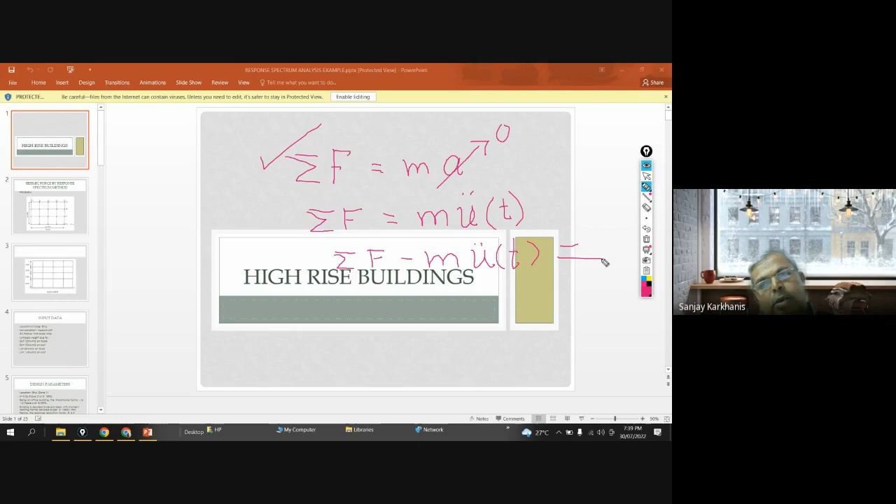Okay, D'Alembert's principle. If you go back to structural dynamics, or simply dynamics, you will see that D'Alembert found this equation, that similar to static equilibrium, this is dynamic equilibrium, and this m into acceleration is called inertia.

So this is why we are interested in finding out mass of the structure, because finally you have to solve this equation, and now this equation is not a simple equation. It is a dynamic equation which is varying at every time. So at t equal to 1, it will have some different equation, t equal to 2, it will have a different one.

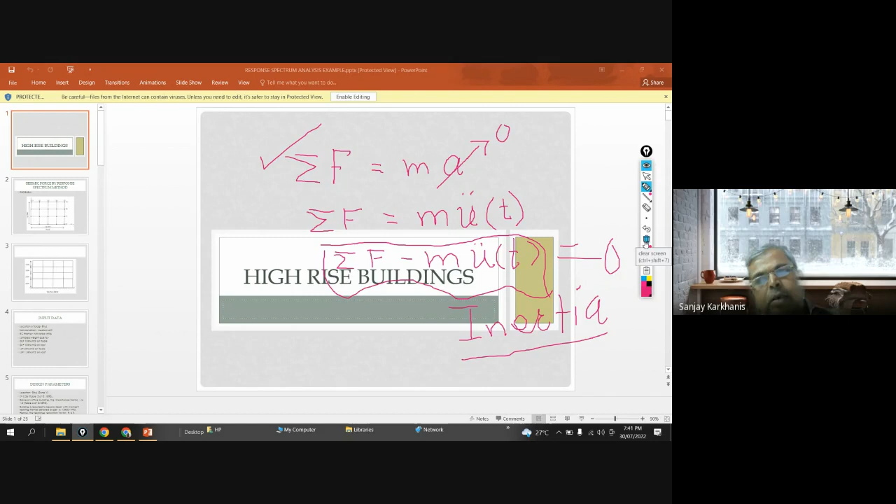And that's why this dynamics becomes a little bit complicated. The only thing is that if you can find out the inertia and include the inertia effect, then finally you will see that F minus m u double dot t will be equal to 0. So this is why we are finding out inertia effect, and we are relating any dynamic force with that. Now we are going to use that, so we'll find out the way how to do it. Let us go and see.

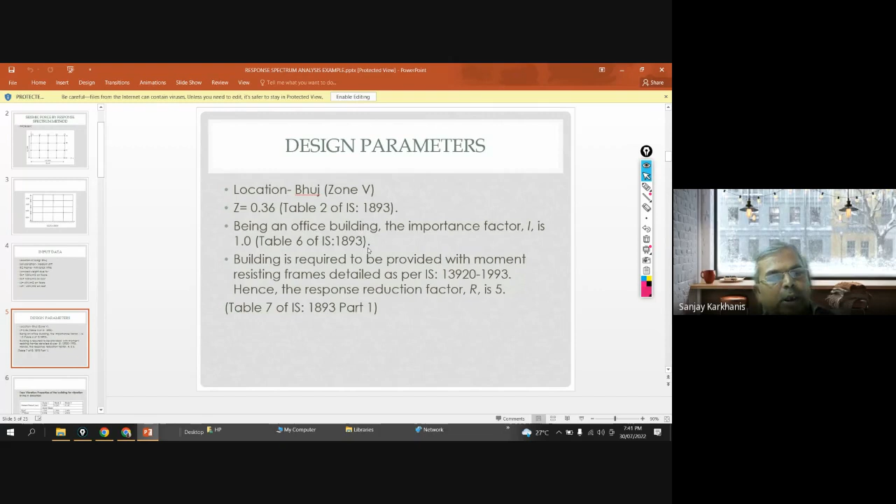Now this is the only thing that you should understand. We are finding out dynamic characters, and as previously I discussed, every building has its own dynamic properties. In equivalent static method, we considered only this much mode, this first mode. So we said that the building will vibrate something like this, and finally we calculated VB, and this VB was distributed at every floor. We said the deformation is this, meaning only this shape, first mode. But actually, this is possible only for degree of freedom equal to 1, right?

But if you see any building or structure, the mass is not concentrated at any one point. So it is distributed all over the floor, and all over the height. That's why we are distributing, or assuming the mass distribution at floor. Let's say if you are having 3 floors, every mass has a degree of freedom in one direction as 1. So there are 3 masses, so degree of freedom will be 3.

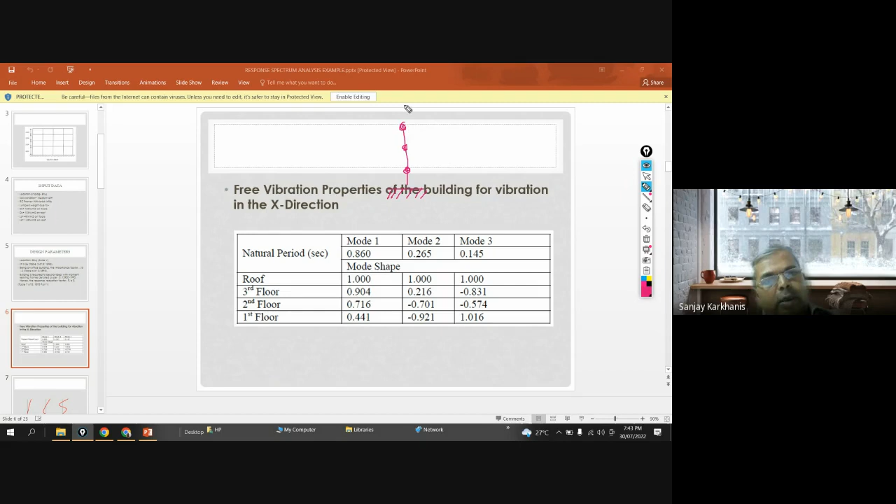And with respect to that, if you go for dynamic analysis, you will find this as mode shape 1, then this will be some mode shape 2, and this will be some mode shape 3. I'm just saying pictorially, but this mode, it is a property of a structure, and it is found out with the help of free vibration analysis. How that free vibration analysis is carried out is a topic of structural dynamics. Let us say we have one instrument which will give you the dynamic properties. So these are the dynamic properties.

So we have carried out the analysis for the above said building in our example, and we are considering this as input for us, which is actually output of free vibration properties of the building for vibration in the x direction.

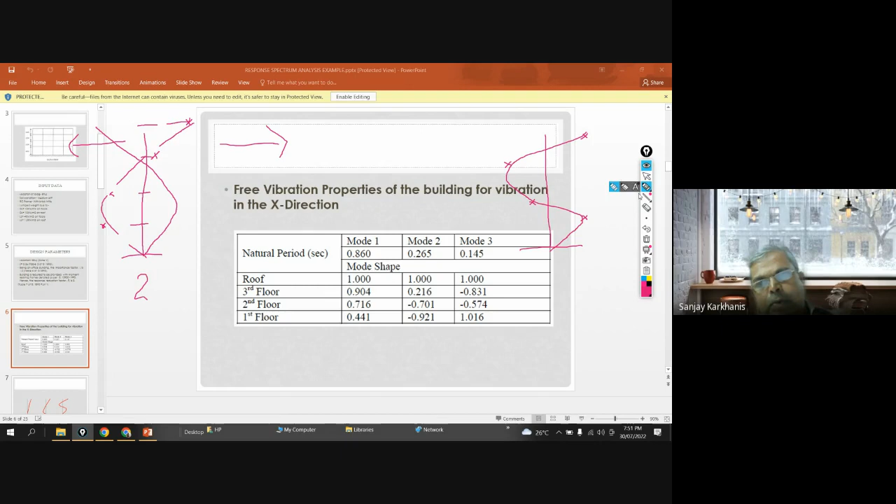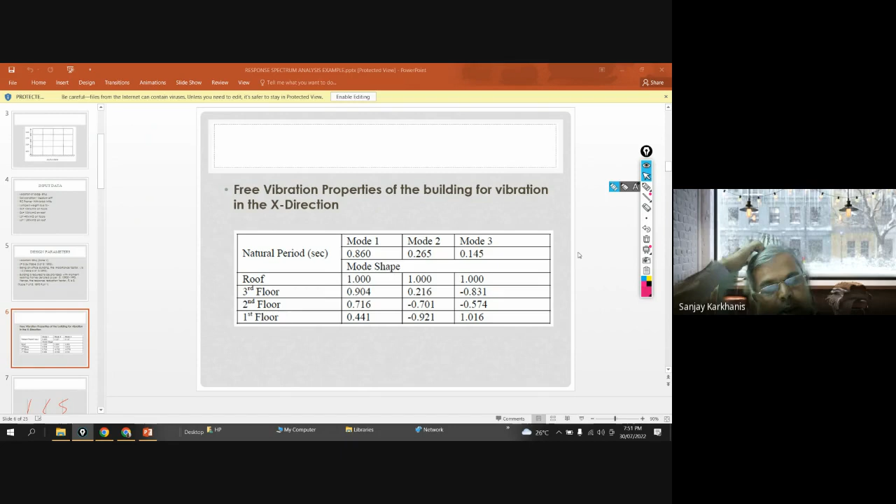Clear? Yes, sir. Now this is why we are interested in free vibration analysis. Did this query come to your mind - what the hell is this free vibration analysis, and why is it important when you are going for earthquake analysis?

Okay, let me tell you. These are the basic characters of the building. See, what is the chance that the building will vibrate in mode number 1? Only when you are having time period of earthquake vibration as 0.86. Is this much clear?

Yes, sir. Is it clear? If not, say so, because I don't know how much time it will take, but unless and until you understand these concepts, you will never get belief or confidence in your mind. Many times you may solve the problem, but you will not be confident.

Let's say this is a building. Free vibration analysis is trying to tell you that if the building is vibrated with this time period, it will vibrate like this. If the building is vibrating in this period, then it will show these type of deformation. And if it is vibrating in this mode, then it will vibrate like this. Clear?

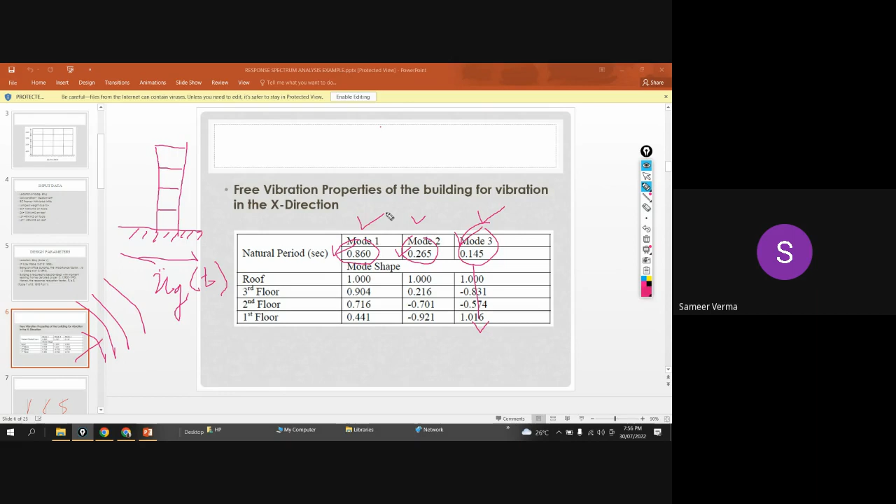No, sir. And that is why we are using dynamic analysis with free vibration properties of the structure, combining it with earthquake and getting the lateral forces. Clear? Yes, sir. Now we'll move forward.

So the first thing we did was structural dynamics - after doing this building's analysis, you got the modes. Now with the help of this mode, what we are finding out - this slide is showing you the mode shapes that I already explained. Clear? Yes, sir.

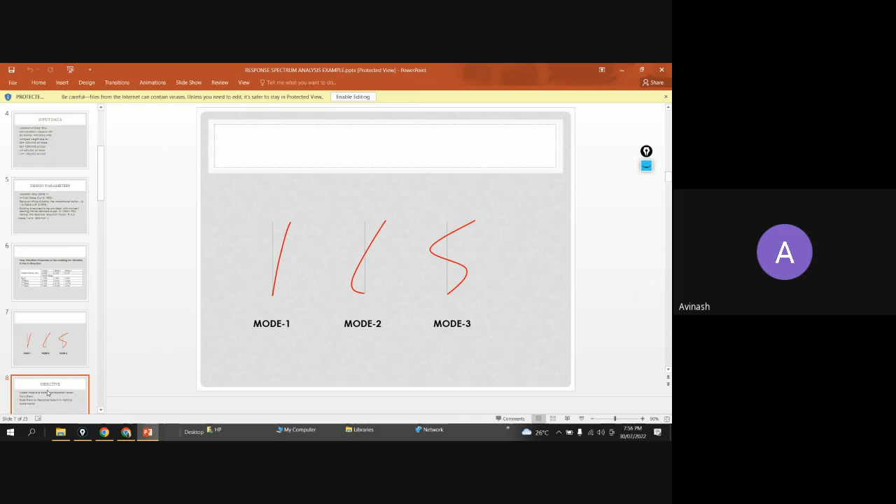Now the objectives: modal mass and modal participation factor, story shear, base shear by response spectrum method, and scale factor. Up till now, you have understood this story shear a little bit, but you're totally unknown with this - does anybody know about modal mass and modal participation factor? No, sir.

Okay, and this is - we are finding out the base shear with the help of response spectrum, as earlier we found out base shear with the help of equivalent static. So this is clear, this is clear, and these are the two points where you don't know anything.

Yes, sir, so we'll try to see. I'm not going into mathematical definition right now - later on we will see the mathematical definition of modal mass and modal participation factor. But try to understand it.

How it will differ - see, this is your building, and let's say this is your mass, and this is your mass, and there is an earthquake, and it is generating acceleration ug of t. It is vibrating the base.

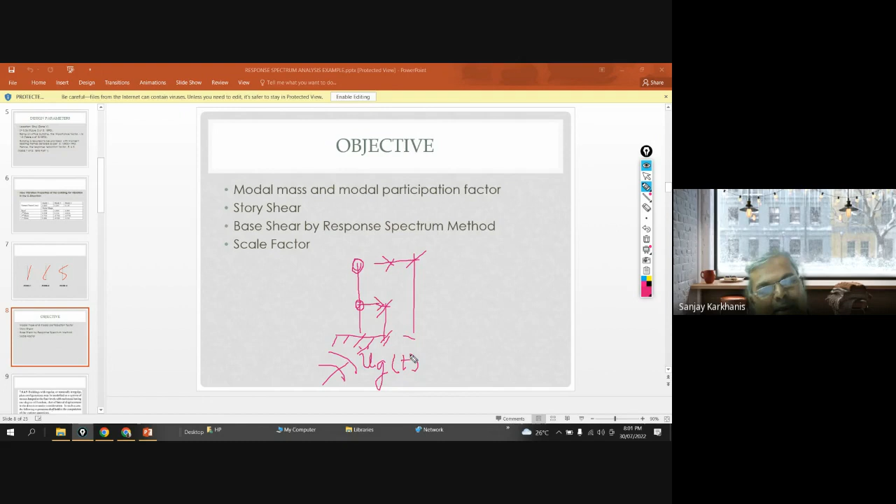So if it is having some acceleration, the same acceleration will not be subjected over here - there will be some different acceleration, which we call spectral acceleration. This will have another spectral acceleration, and that also depends upon rigidity, whether the building is rigid or flexible, right?

Now, do you know the basic difference between rigid and flexible structure? Let us say this is a complete solid, filled with concrete material, and it is subjected to some acceleration.

What will happen? Because of this acceleration, the entire structure might move up to here - it will go like this, right? So this may be the movement.

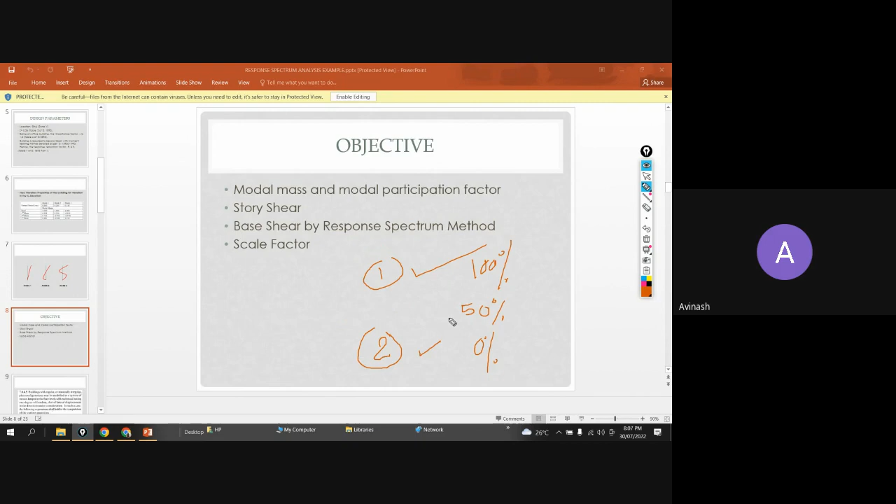No sir, the same way we are somewhere here. That means percentage of mass getting contributed in the action is called modal mass.

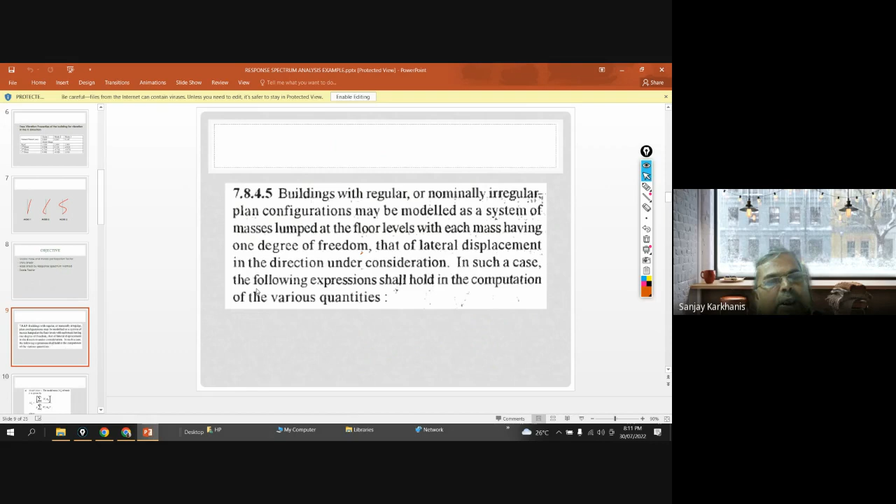Clear? Now you can see this clause, just read it. Buildings with regular or nominally irregular plan configuration may be modeled as a system of masses lumped - we have read this. Having each mass having 1 degree of freedom, that is the lateral displacement in the direction under consideration. In such case, the following expressions shall hold in the computation of various quantities - the various quantities are modal mass and modal participation factor.

Okay, now we are having 3 mode shapes, so we are going to find out 3 modal masses. Modal mass in K mode, that is first, second, third, or whatever. If you are going for n number of floors, you will be going for n number of modal calculations, n number of modal masses. So modal mass Mk of the mode K is given by this equation.

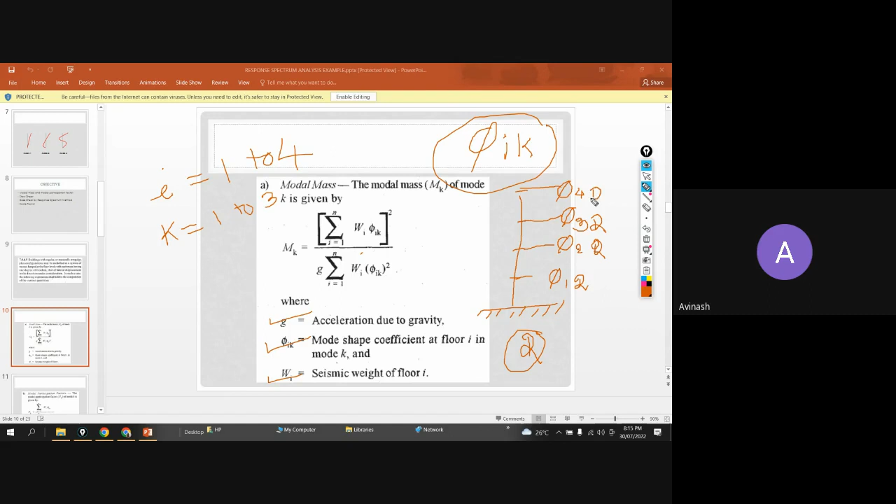Clear? Yes, sir. So phi ik is not at all a big deal. It is now, if I consider this as 2, then it will be 2. और ये 3 है तो ये 3 होगा, बाकी तो वही रहेंगे ना।

Yes, sir. Now we'll go back to our results that we have found out.

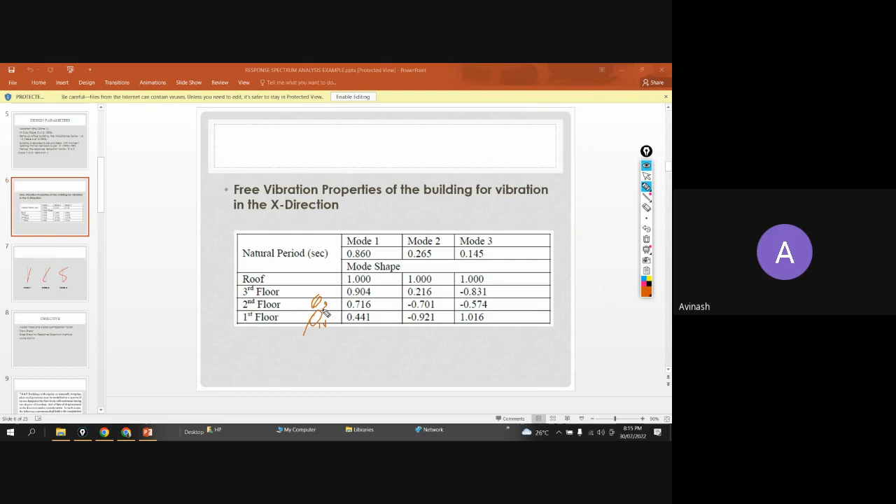ये था ना? Yes sir. So this will be phi 11. This will be 2, phi 21. This will be phi 31. And this will be phi 41. Right? So this will be phi 13. And this will be phi 43.

Okay, Yes sir, what about this? This will be phi 32. First I and then K. I is floor and K is mode.

Okay. So phi ik is a ratio or coefficient in floor I in mode K, at floor I in mode K.

अब क्लियर हुआ? Yes sir. So अब वो डेफिनेशन दोबारा पढ़ते हैं, अब देखते हैं वो क्या बताती है कि मोड शेप कोएफिशिएंट एट फ्लोर आई इन मोड के। क्लियर हुआ?

yes sir, स्टिल कुछ गड़बड़ है? हेलो? यस सर। Okay, now we'll see that.

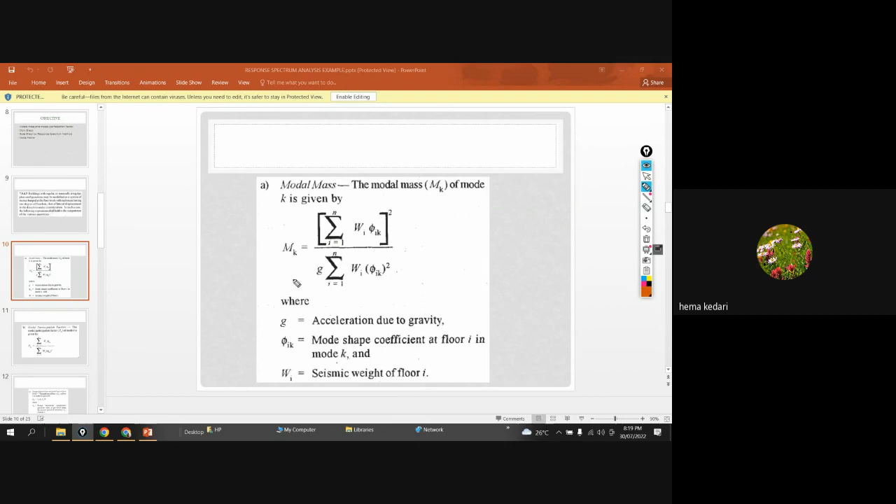हेलो. Yes sir. So modal mass के WI phi I K. Okay. That was a little bit of a mistake from my side. Actually, see, this is WI phi I K. So K is always 1.

I is varying. Okay. So it should be W1 phi 1 plus W2 phi 12. No, K is 1. Now I equal to 2, so 2. 1 plus W3. Now I equal to 3, so phi 31. And K is constant.

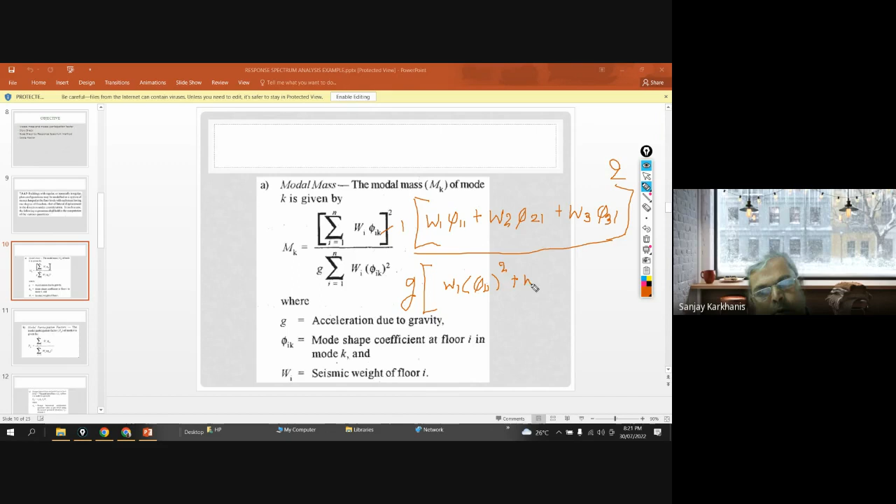So this is for mode K, divided by G, into bracket W1 phi11 square, plus W2 phi21 square. Similarly that.

तो ये कैलकुलेट कर सकते हैं. Yes sir, कुछ बड़ी बात नहीं है और ये हमको करना भी नहीं है। हमको सिर्फ इसको थोड़ा प्रैक्टिस करना है। Okay, so this is modal mass.

सो मॉडल मास, so each mode will have one modal mass. Clear? So mode number 1 will have one mode mass.

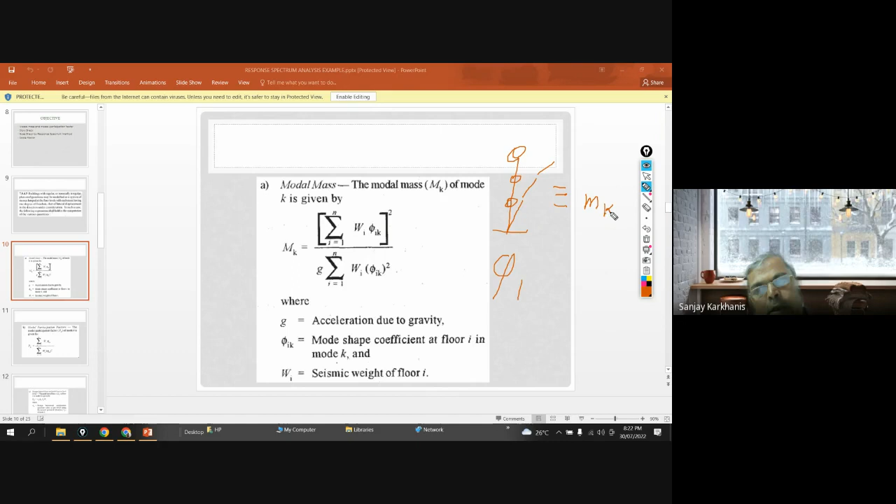And now finally what we are trying to say is, so this was your deformation and this was your mode number 1 and this was your mass. हम लोग इसको इफेक्टिवली, इन तीनों मास को इफेक्टिवली, वी आर गोइंग इन 1 mk, that is k equal to 1. ये सबको मिलके हमने अप्रोक्सीमेटली मॉडल मास निकाला in this vibration.

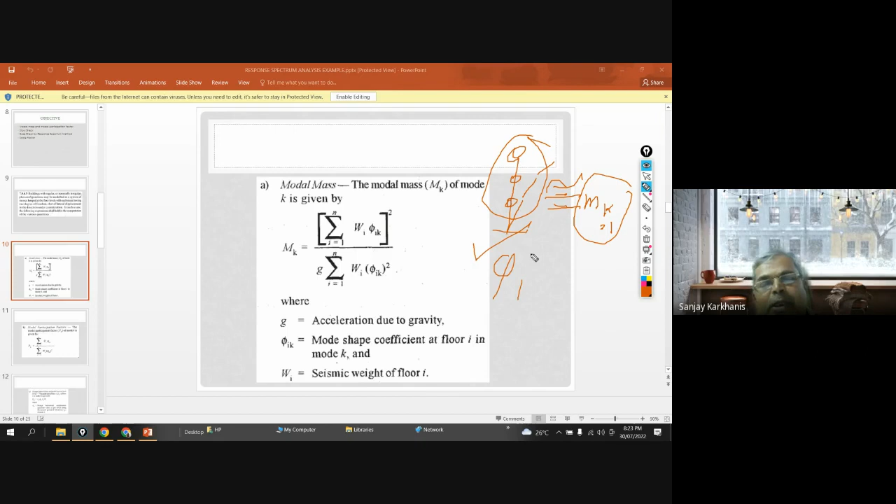That means whatever may be the total mass of this entire building, if the building is subjected to some frequency for this mode number 1, only this much mass will get activated, and due to activation, it will dissipate the energy. Clear? Yes, sir.

तो जिन्होंने दिमाग लगाया सही लगाया कि नहीं?

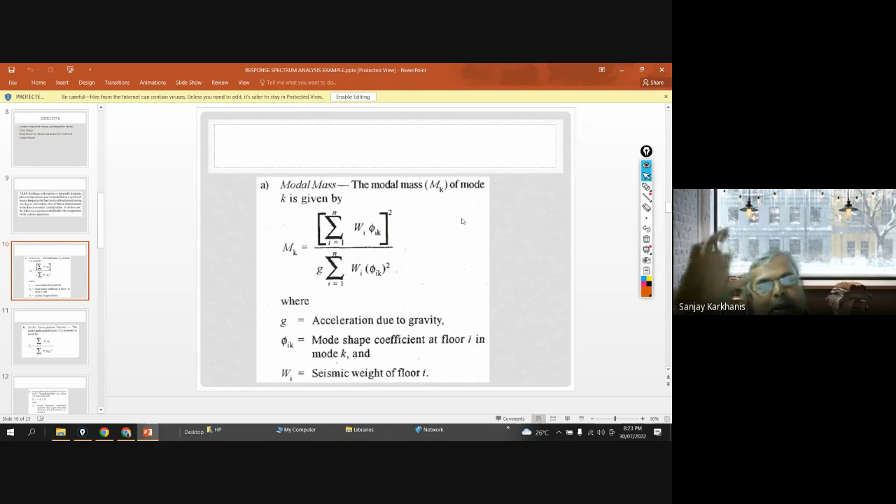बिल्डिंग कितना कॉम्प्लिकेटेड है, फिर भी उन्होंने अप्रोक्सीमेट करके बोला कि पूरे बिल्डिंग में अगर ये वाइब्रेशन से बिल्डिंग डिफॉर्म हो रही है तो कितना एनर्जी डिसिपेट होगा, that will depend on कितना मास एक्टिवेट होगा.

So you will get 3 masses. मास को लेके क्या करना है भाई, फोर्स चाहिए ना? So we are not interested in mass, we are interested in design lateral force at each floor in each mode.

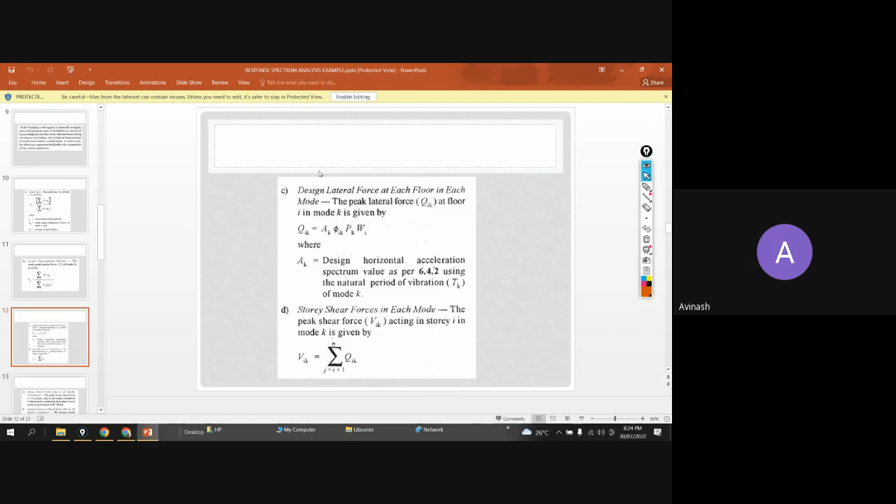अगर वो बिल्डिंग मोड नंबर 1 में वाइब्रेट हो रही है तो एवरी फ्लोर को कितना फोर्स आ रहा है, मोड नंबर 2 में वाइब्रेट हो रही है तो एवरी फ्लोर को कितना फोर्स आ रहा है, और मोड नंबर 3 में वाइब्रेट हो रही है तो एवरी फ्लोर पे कितना फोर्स रेजिस्ट करना है, क्योंकि जितना रेजिस्ट करना है पता चले तो डिजाइन करेंगे ना। So that we are finding, design lateral force at each floor in each mode.

अब ये डेफिनेशन भी लोगों को ध्यान में नहीं आती, बोलते यार कोड में क्या लिखा है पता ही नहीं चलता। सो ये कुछ नहीं है, this is a peak lateral force, maximum lateral force, and that's why it is called QIK. That means I will be the number of floor and K will be the mode, at floor I in mode K.

होता है ना ऐसा? मेरी टीम में अगर सचिन तेंदुलकर आया ना, तो मैं भी 500 रन एक मैच में करके दिखाऊंगा। रिक्वायरमेंट क्या है? I must have सचिन तेंदुलकर in my team। वैसे ही अगर somebody gives me what is the maximum lateral force at each floor in each mode, तो डिजाइन तो बहुत सिंपल है, I can design it। So that QIK, so we are finding out QIK.

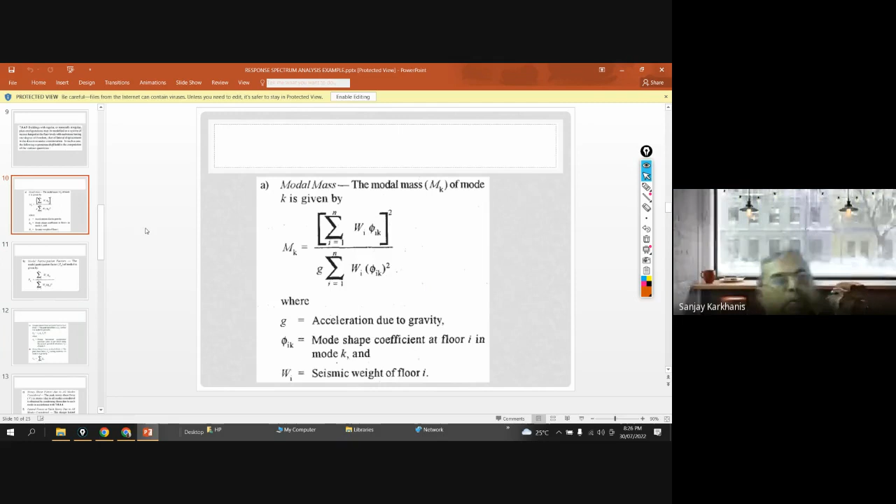So एक step मैं आगे गया, in this we got modal mass, and then with the help of mass we will find out a participation factor, and that participation factor is again nothing but wi phi ik sum divided by wi phi ik square sum, and then find out the ratio. Again, this is also a factor or ratio. Clear?

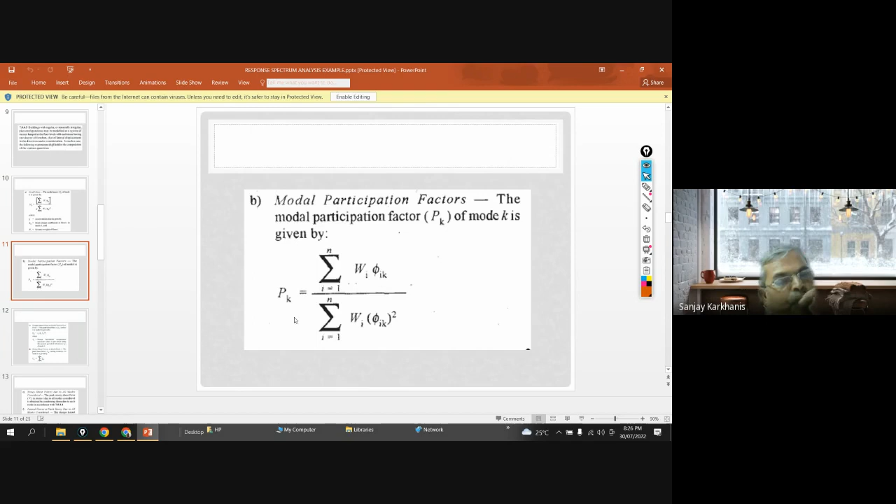क्लियर सर। Okay, now you know mk, you know pk - आमिर खान वाला नहीं, ये पीके अलग है। So if you know pk, you know wi, and already free vibration analysis has given you phi ik।

अब ये नया बंदा आ गया ak, ये कुछ नहीं, वो पुराना ही है, बस फॉर्म बदल गया है। ak is design horizontal acceleration spectrum value as per 6.4.2, using natural period of vibration tk of mode k। तो भाई आपने जो निकाला था TA, अब उसकी जरूरत नहीं, you can find out T1, you can find out T2, and you can find out T3। Actually free vibration analysis has given you this, बराबर? इसको यूज करना है और वही स्पेक्ट्रम में जाना है, and ऐसे Ak निकालना है।

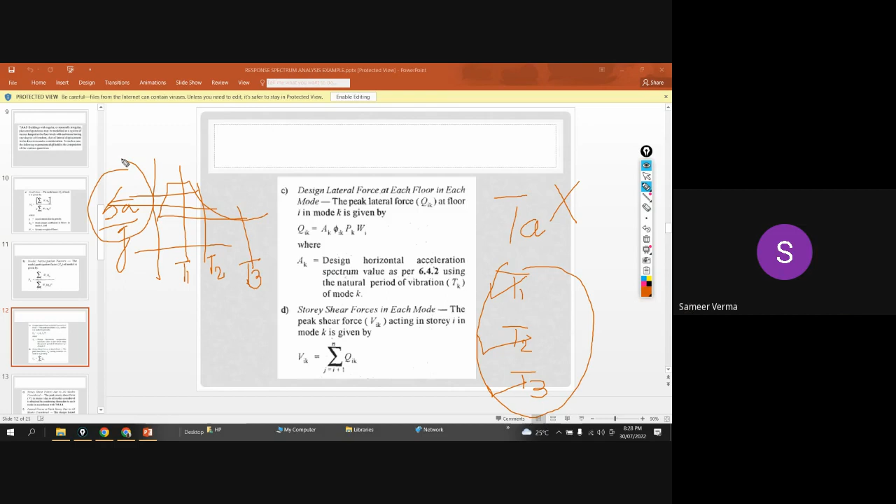फॉर दिस T1, मे बी T2, T3, तो आपको 3 मिलेंगे ना, ऐसे baij? यस सर, that is AK। क्लियर?

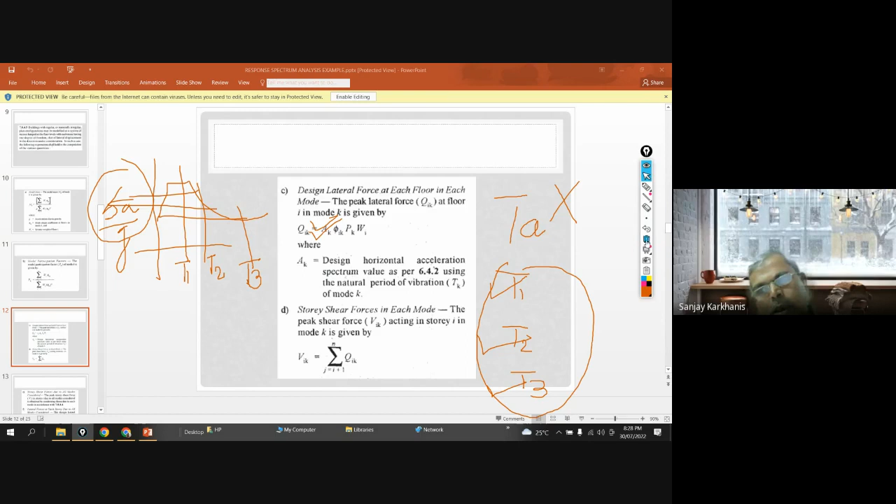अब देखो, हमें तो कुछ करना नहीं है, सब कुछ उसको ही करना है, हम सिर्फ कलेक्ट कर रहे हैं, और फिर भी बोलते हैं सर बहुत डिफिकल्ट है। Okay, so we will find out AK with the help of 6.4.2, and then you are finding design lateral force at each floor in each mode, QIK। तो इसको थोड़ा बाद में देखते, so you can find out QIK and then you will find out VIK। अब इसको भी थोड़ा बाद में देखते।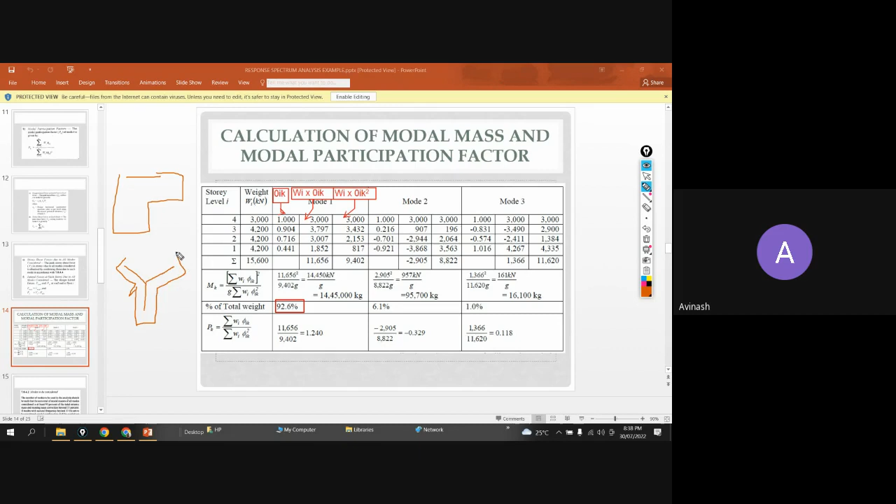Now, if you are having building something like this, or you are having building something like this, ये होता है ना ऐसा? Yes sir. Yes sir. So you just cannot go with assumptions, because that may give you unpredictable behavior, and actual behavior may be different.

That's why, and right now we are having a lot of instruments for our help, so we are going for dynamic analysis, and we say that if the building is subjected to more than one mode, why we are going for equivalent effective static load method, we can go for dynamic analysis. And let's see what happens if somebody goes for mode number 2 and mode number 3.

अब देखो यहाँ पे क्या हो रहा है, ये result given by free vibration. This multiplied by 4200 was marked over here, then this multiplied by 4200 marked over here. Same process was carried out here and here. And now you can see this 2.905 square divided by 8.822 which is coming out to be 957 kilonewton divided by G.

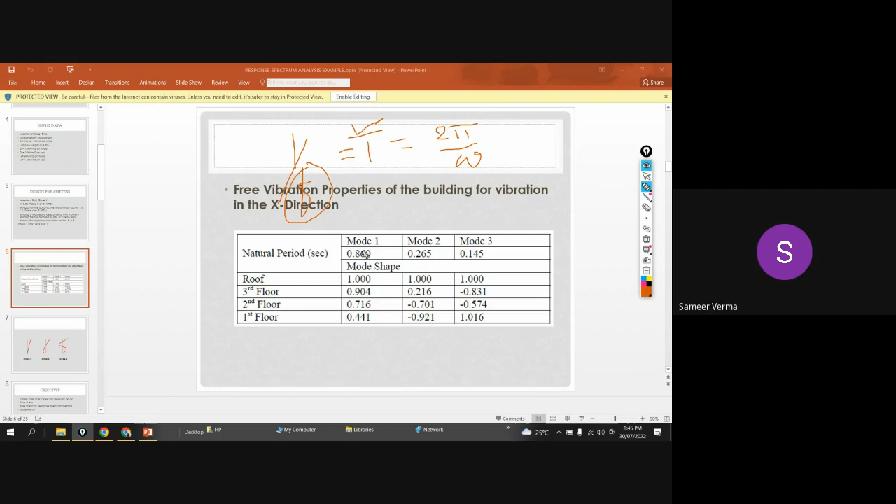Yes, because T is equal to 2 pi upon omega, which is circular frequency. Or if you consider frequency in hertz, T is equal to 1 upon F. अगर T higher है तो F lower होगा ना? Yes, sir. Okay, and you see that lower frequency itself is sufficient for your analysis. You need not worry about this.

And earthquake effect on buildings is always under lower frequencies. So the frequencies which are higher than 33 hertz, ये mechanical engineers के लिए लगता है वो various RPM, higher RPM को machinery vibrate करते हैं ना, तो that is their field. Of course, that doesn't mean that you cannot read that, but there is lot of ample literature available, but that will not help you in civil engineering.

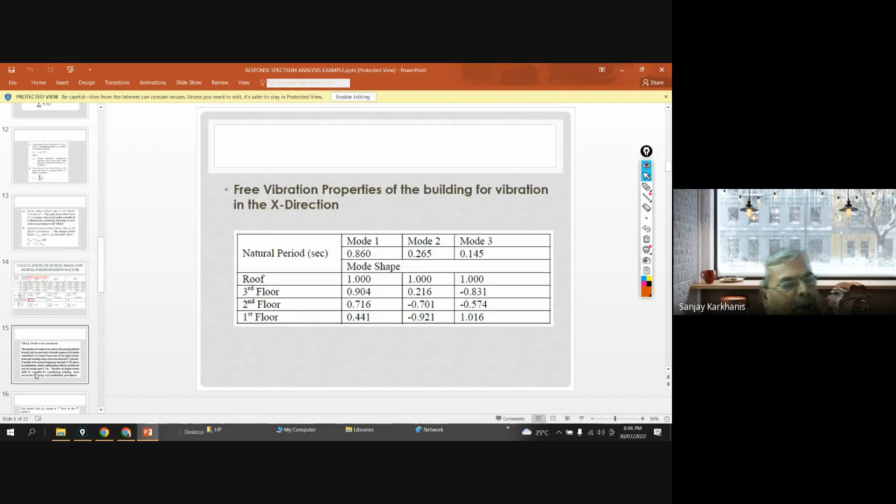That's why I will say that ओके, code ने भी वैसे आपको बोला है ना 90%, भैया 90% mass दे दो and only up to 33 hertz पे रुक जाओ। If anything is beyond 33 hertz, then that missing mass correction will be applied, and that missing mass correction is with rigid body movement and all that. But don't go into that. So I will say that this modes to be considered, ये आपको सिर्फ यहाँ तक ही पढ़ना है।

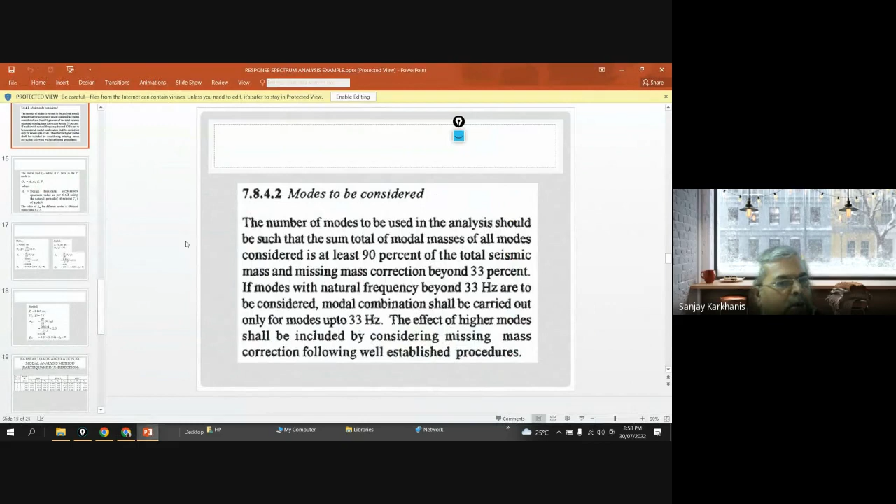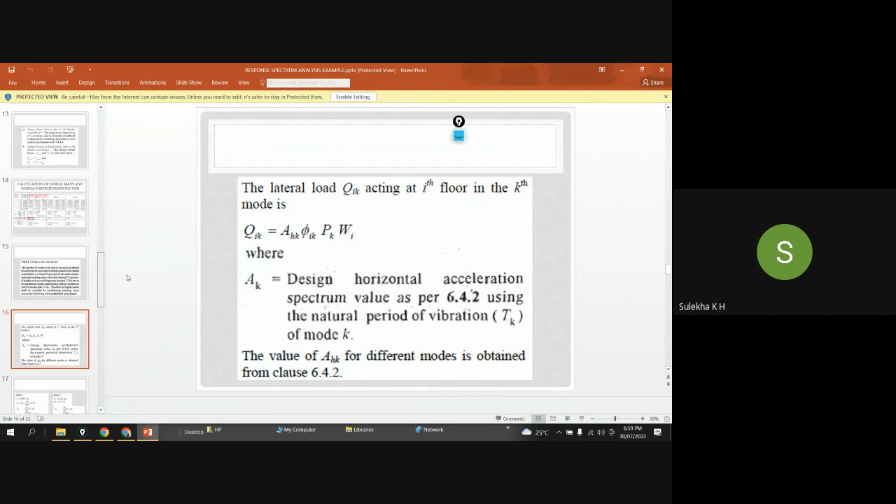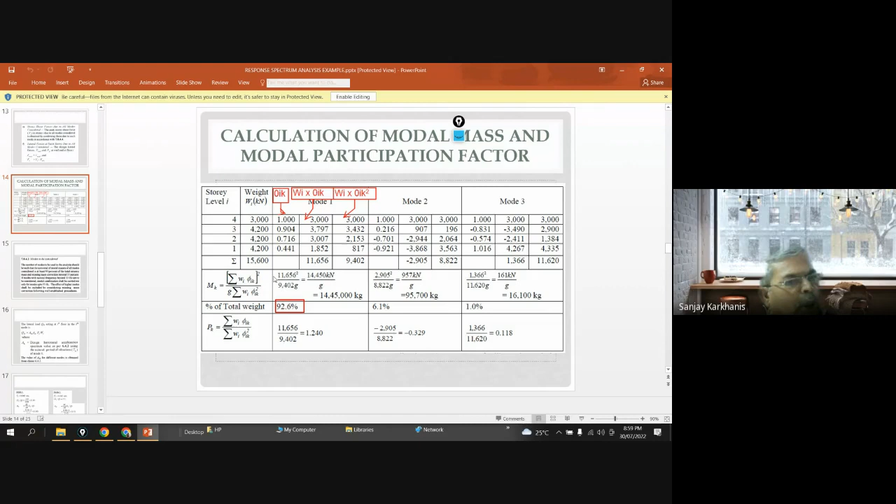From that table. Yes, here. See, actually this is confusing only because code says percentage seismic mass percentage, and here we are talking about weight. That's why there's confusion. Why the confusion is there? You can see if I'm getting this value.

So this is my total mass which is getting activated in mode number 1. Clear? So how much is it? Let's say 14,450 divided by G. I'm not including G equal to 9.81. I'm keeping it as G.

And I'm saying that this is in kilonewton. So that's why I'm saying instead of seismic mass, I'm saying seismic weight. Now this is my total seismic weight, right? Yes, sir. So that is 15,600. Now, if it is divided by G, then this G and this G will get cancelled, and finally I will get this value.

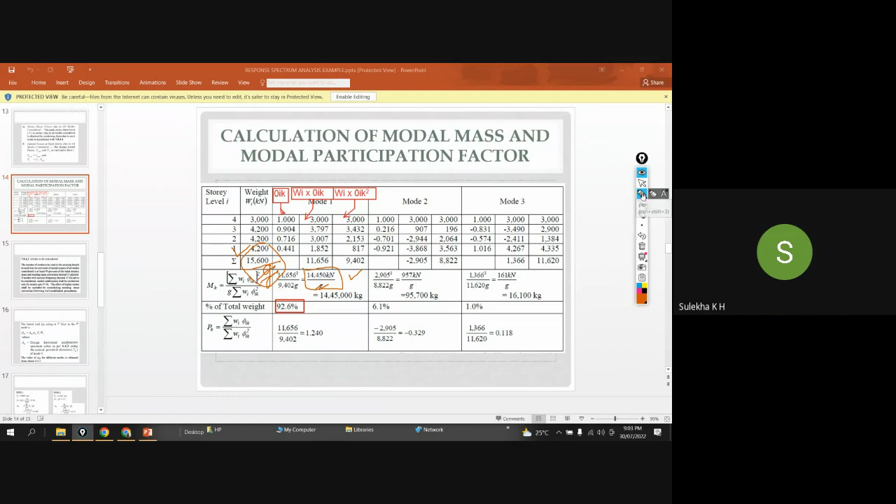Now it's okay? Yes. If anybody has doubts, don't keep the doubts with you.